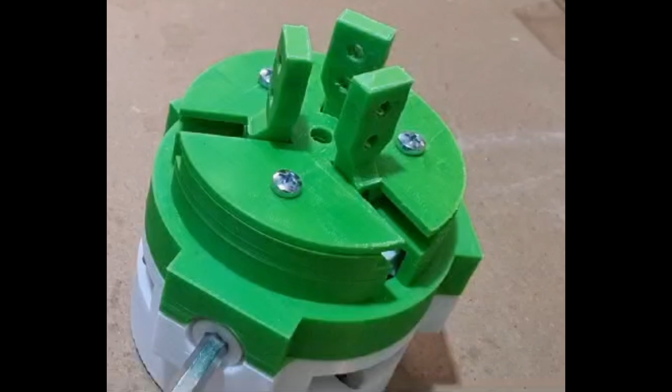Welcome to another tutorial. Here I show how to model a 3-jaw chuck in Solidworks for 3D printing.

Pinion gears in yellow, chuck housing front and back in gray, jaws in blue, driven bevel gear in green, and scroll part in light blue. Pinion gears turn the bevel gear, which has a scroll plate on the other side.

Here is the completed assembly, and we are viewing it from the scroll plate side with the chuck housing front in transparent state. The pinion gear turns the scroll plate, which causes the jaw to translate towards the center of the chuck and away from the center of the chuck depending on the direction of rotation for the pinion gear.

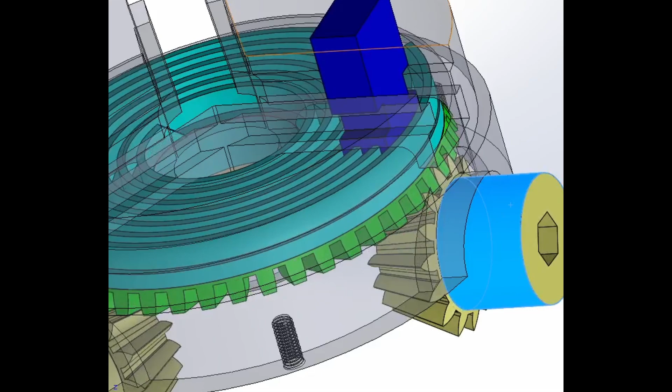We start with modeling the scroll plate. This part threads onto the bevel gear. Here is the basic revolve profile. Start a sketch on the right plane with a center line and add the dimensions to the geometry accordingly.

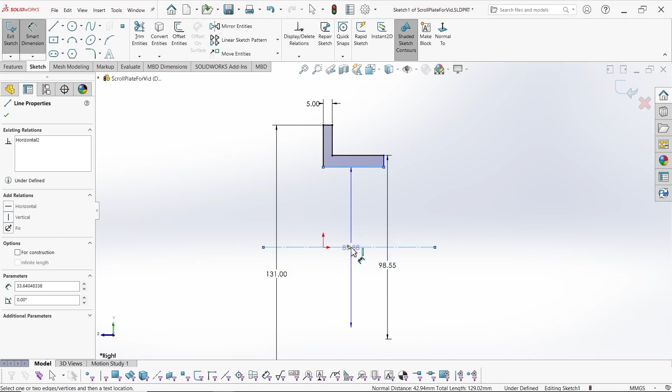Now we need to add appropriate size threads to connect the scroll plate to the bevel gear. I selected M55 by 4 threads. Now in equations, add the external diameter, pitch, thread height, and thread radius.

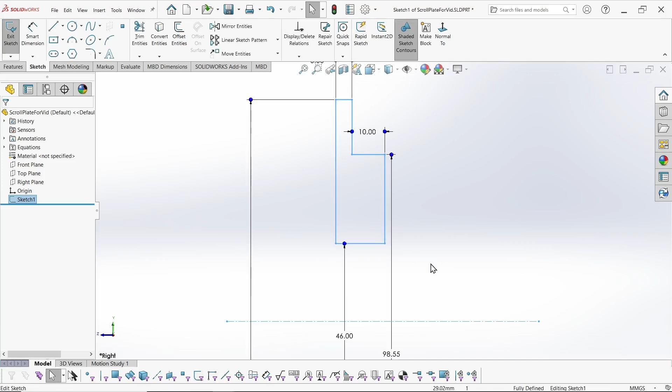Next, set the dimension to external major diameter and cut the external thread as shown using the swept cut command, where the profile is the thread and path is a helical curve.

Before cutting the thread, we need to add a small chamfer to the face. Add a helical spiral where the diameter is the external major diameter and the pitch is equal to the pitch of the thread, or 4 mm per thread.

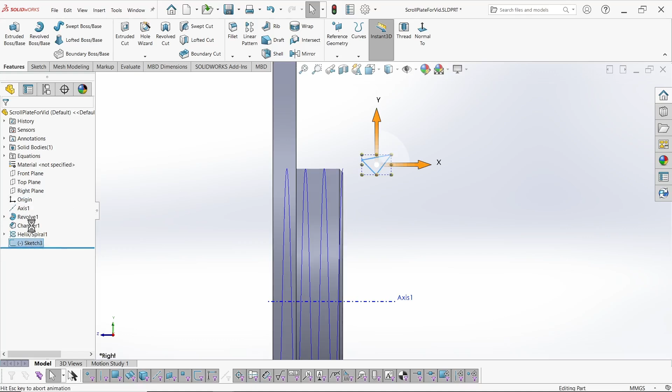Before moving forward, it is good to create an axis that goes through the part. Next, create the thread profile on the right plane. The thread profile has a 60-degree angle, and the dimensions for external major diameter, thread radius, and pitch come from the equations that we added previously.

Constrain the line to be horizontal and draw a vertical line between the bottom of the thread and middle of the thread. Constrain this vertical line to intersect at the midpoint.

Create a 3-point arc connecting the horizontal line to the angled line. Mirror this arc about the center line of the thread and set a tangent constraint between the arc and the lines.

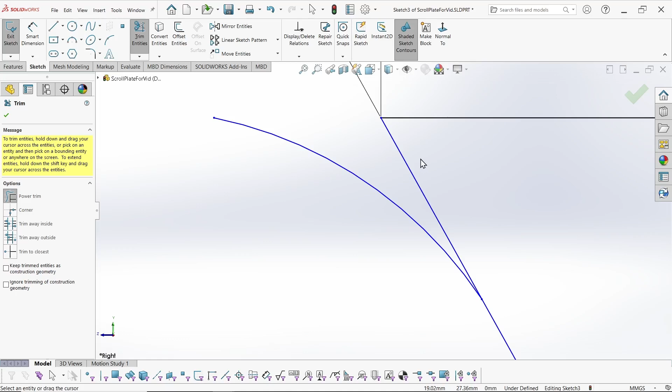Create a fillet at the bottom of the thread and set the radius to thread radius from the variable defined in equations.

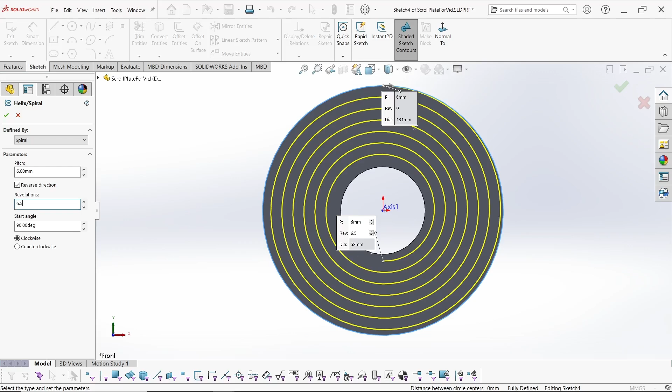The final step for the scroll plate part is to add the scroll. The scroll is a sweep where the profile is rectangular and the path is a spiral. First, create the spiral by setting the pitch and number of revolutions. Then create a sketch of a rectangle on the right plane to be the profile of the sweep.

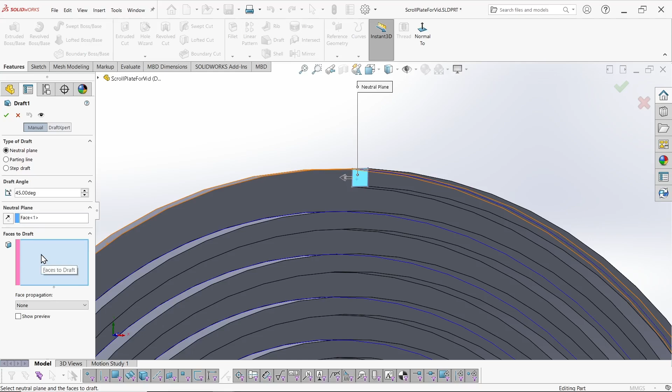Draft the end faces of the scroll plate spiral using the draft command with a 45-degree angle towards the face of the part. Set the face to draft as the small face and the neutral plane as the large diameter face.

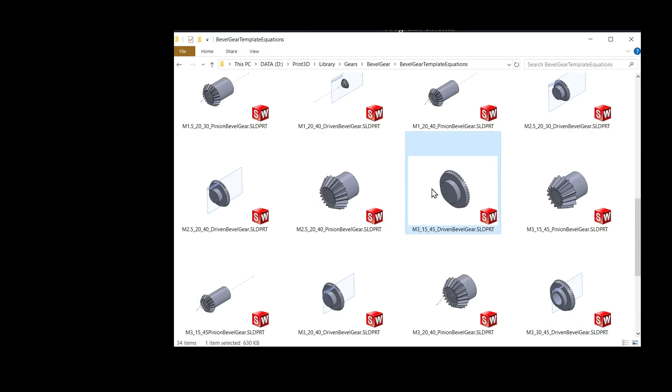Change the color of the part to green so we can see it in the assembly. The next part to create is the bevel gear, which will thread onto the scroll plate part created previously.

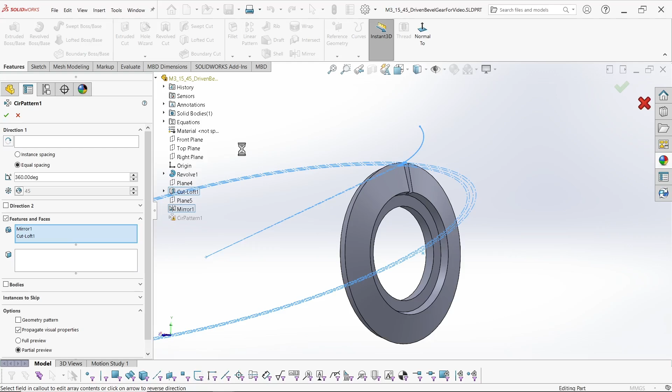Looks like there is an error here which may have occurred due to changing the revolve sketch. The error is due to deleting the axis of rotation of a single tooth cut for the bevel gear. Create a new axis by selecting the right and top planes, and then set it as the axis of rotation to resolve the error.

Next, we add equations for pitch, internal minor diameter using the minimum dimension, thread height, and thread radius. The process is similar to the one shown previously for the external thread.

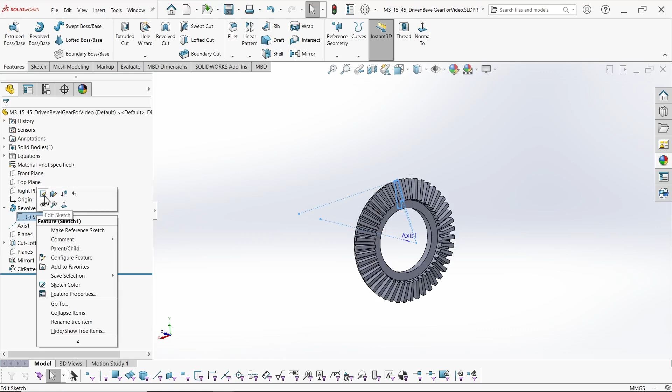Now that we have defined a dimension for the internal minor diameter, we can use it to modify our sketch. We set the internal diameter of the bevel gear to this dimension so that we can cut the internal threads of an M55 by 4 thread. To create the internal threads, we first have to create a small chamfer.

Now, we create the thread profile, which is going to be the profile for the swept cut feature that will be created later. It is good to create a section view with the right plane to help us see what we are doing. To create the thread profile, we start with a sketch on the right plane. Draw a triangle. Draw a center line over the axis of the part and set this line to construction.

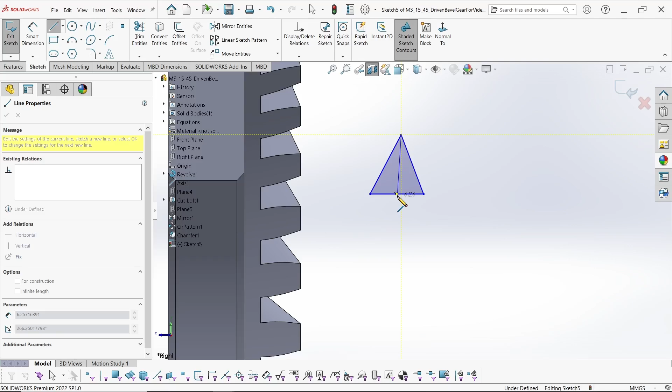Draw a vertical line from the top of the thread to the center and constrain it by making it vertical and coincident to the midpoint of the bottom line. Set the length of the bottom line of the triangle to the pitch. Set the angle between the two lines to 60 degrees. Set the diametrical dimension of the bottom line of the thread profile to the one defined in equations for internal thread minor diameter.

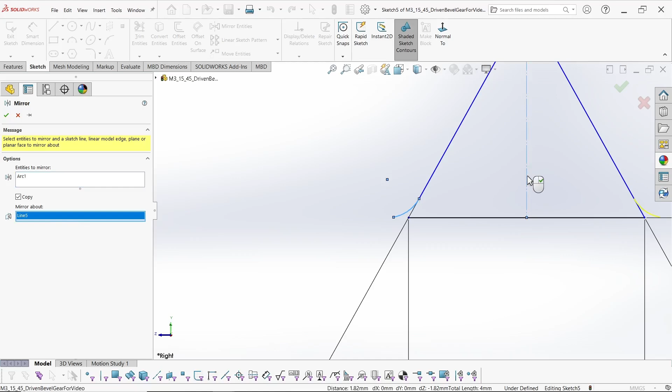Now create a 3-point arc for the bottom corners of the triangle. Create a tangent constraint between the arc and the angled line. Trim the previous line and mirror this arc using the profile centerline as the mirror line. Trim the extra line that is on the other side as well. Then, set a coincident constraint between the end of the three-point arc and the bottom leg of the triangle. It will automatically get set on the other side since this arc is mirrored.

I will need to delete the dimension for the length of the bottom leg and redefine it because SolidWorks is not able to find a solution as the sketch is defined now. I remove 0.005 mm from the pitch so that SolidWorks does not give an error while performing the swept cut. The next step to creating the thread profile is set another tangential constraint between the arc and the bottom line of the triangle. The radius of the arc is set to the thread radius defined in the equations previously.

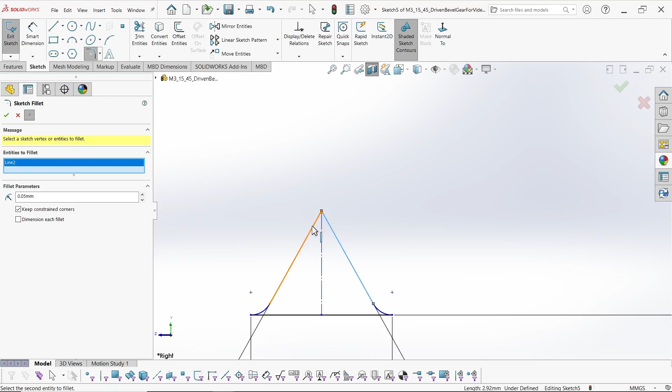The final step for creating the thread profile is to create a fillet at the top corner of the triangle. The radius for this fillet is also set to the thread radius variable defined in equations.

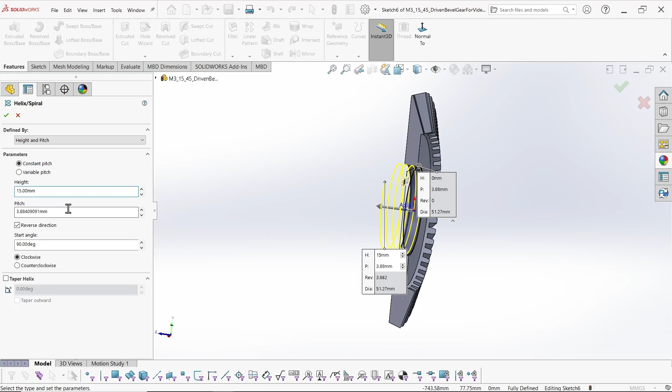It looks like I did not define the helix, which is what I like to do before creating the thread profile. No problem, we can just change the end of part by dragging the line above the sketch that we created previously. Now to create the helix we need to create a sketch that includes just a circle. The diameter of this circle is set to the internal minor diameter defined in equations previously. To create the helix we define a height and pitch. The height just needs to be large enough to go through the part along the z-axis and the pitch is equal to the thread pitch.

The final step for completing this part is to create a swept cut feature. The swept cut feature requires two inputs: a profile, which is the thread profile, and a path, which is the helix. You do need to make sure that the helix starts on the same plane of the thread profile sketch or else you will get an error.

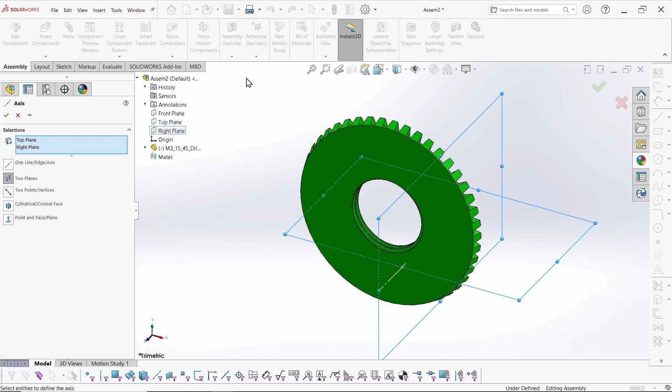We can now begin creating an assembly using the two parts that we have created. The two parts are the scroll plate and the bevel gear. Let's start by bringing in the bevel gear. Let's start by defining an axis for the assembly using the top and right planes of the assembly. Then, create a coincident constraint between the bevel gear axis and this assembly axis.

Next, set the right plane of the assembly coincident to the right plane of the bevel gear. And finally, set the front plane of the bevel gear coincident to the front plane of the assembly. Now that the bevel gear is fully constrained, we can bring in the next part, which is the scroll plate.

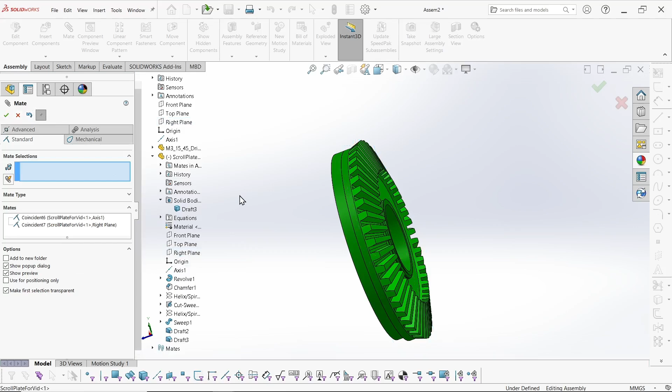To constrain the scroll plate, we start by creating a coincident mate between the faces. Then, we align the axes to one another. Finally, to fully define the scroll plate, we set the right planes of both parts to coincident. I noticed that I set the color of both of these parts to green, so I will go back to the scroll plate and set it to a bluish color.

The next part to create is the pinion gear that will drive the bevel gear. The pinion gear is selected using the same module, number of teeth for the pinion, and number of teeth for the bevel gear. Those values are 3, 15, and 45 respectively.

The only change we will make to the pinion gear is to add a hexagonal-shaped extruded cut. This hexagonal-shaped extruded cut will fit a 13 mm Allen key. The depth of the cut is 20 mm. We change the color of the pinion gear to yellow so that it can be easily viewed in the assembly.

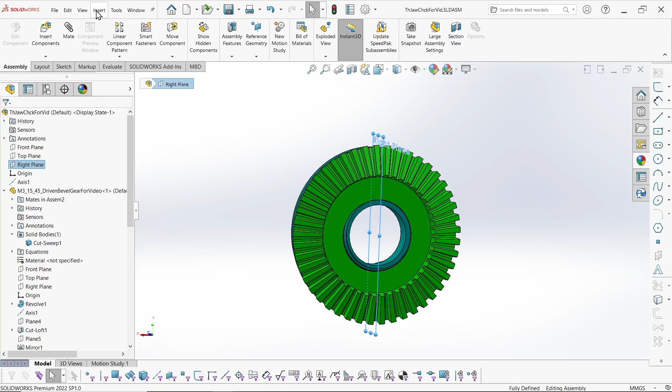Now let's add the pinion gear to the existing assembly. We start by creating mates between the pinion gear and the assembly. We need to use the pitch lines to create the assembly mates, so I will select the sketches from the bevel gear and the pinion gear that contain the pitch lines and show them in the assembly. Pitch lines are lines of action between two mating gears.

It looks like I don't have an axis for the pinion gear. So, let's open the pinion gear and create an axis using the top and right planes. You can use the cylindrical face instead of an axis for a concentric mate in assembly, but I prefer to use an axis because I know it will always be available and it is more intuitive.

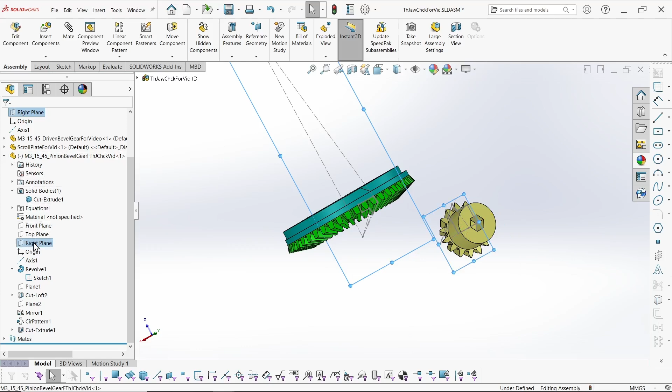We start constraining the pinion gear by mating the right plane of the gear with the right plane of the assembly. Then we mate the pitch line of the pinion gear to the pitch line of the bevel gear. These sketches need to be shown in the part in order to select them in assembly. The final constraint is to set the line that defines the back or end of the gears coincident. Once again, this line is available in the sketch used to create the gear, so it must be set as shown.

Now we can hide the sketches for the pinion gear and bevel gear because their lines are no longer needed. Further, they are annoying to see in assembly. Now, we can have a bit of fun by giving our assembly a satisfying twirl to see how it looks from various angles. Next, we need to create a housing for the chuck.

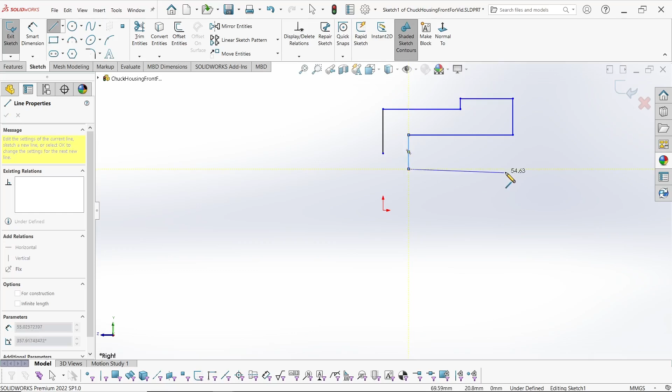The housing is split into two parts that are bolted together using M6 size bolts. The purpose of the chuck housing is to hold the bevel gear and the pinion gears in place so that turning the pinion gear will cause the bevel gear to rotate. I aptly named the two sides of the chuck housing as chuck housing front and chuck housing back. We will start with the chuck housing front.

To create this part, we begin with a sketch that will be revolved. Again, I like to create an axis between the top and right planes as it is useful for creating revolves, mating, circular patterns, etc. The sketch to be revolved needs a center line that is coincident with the axis created previously. This center line will be used to create the diametrical dimensions.

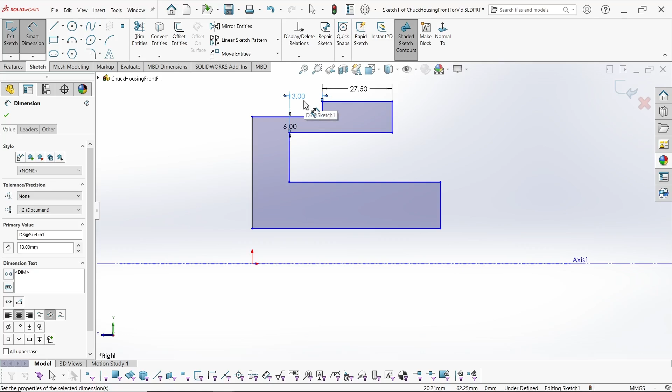The dimensions along the z-axis are mainly constrained by minimum wall thicknesses and have to be long enough to hold the scroll plate and bevel gear. The hole in the part reduces the amount of filament and weight of the part. The large outer diameter is set to 160 millimeters. The smaller outer diameter is set to 45 millimeters so that the scroll plate and bevel gear fit snugly to it. The inner diameter is set to 32.5 millimeters and the rest of the dimensions are set based on what looks appropriate.

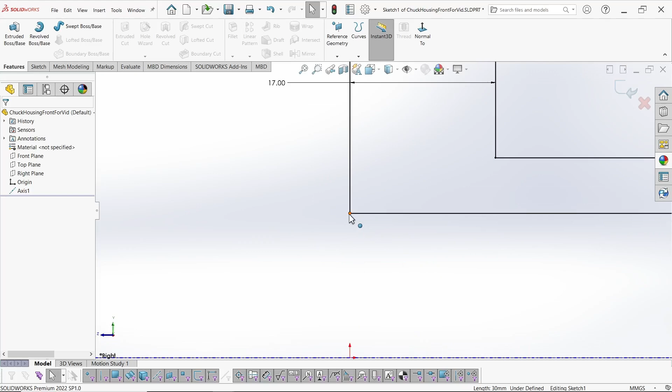Going back to the sketch, we just need to set a collinear constraint between these two lines. I also set the inner diameter to 140 millimeters to clear the outer diameter of the scroll plate and bevel gear.

The next step is to cut the paths for the jaws. There are 3 jaws, so a circular pattern of 3 jaw paths will be created. The jaw path is cut from the larger outer diameter up to the smaller outer diameter, as we will see in the coming steps. I first create a sketch on the XY plane with 1 jaw path and then create a circular pattern of 3 paths around the center.

This will help us visualize what is an appropriate size for the jaw paths. I want to make sure that the paths are large enough to hold a reasonable size jaw, but not too large to the point where I have no material left in the chuck housing front part being modeled here. Now you can get arc dimension by clicking on the 2 arc endpoints. I set this dimension to 1 millimeter to ensure that I maximize the size of the jaw paths and that I have some wall material after I create the cut.

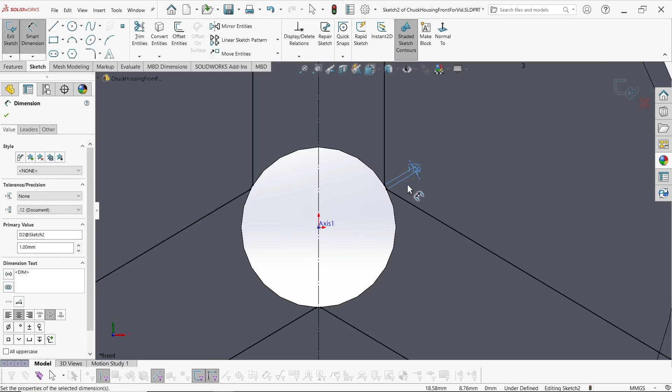Next step is to create a plane which starts at the outer diameter of the part. This plane will be the sketch plane for the jaw path cut.

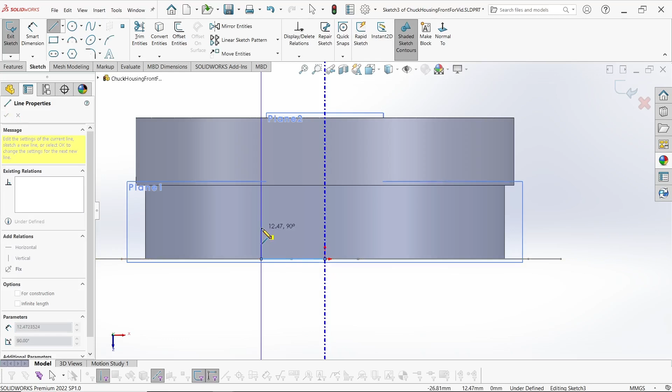Now we create the sketch for the jaw path. Start by drawing a profile for what the jaw will look like. Place a center line that is coincident with the axis in the middle of the profile to be used for mirroring and dimensioning. The dimensions are basically designed to be big enough to allow for translation of a 3D printed jaw. The jaw is the smallest part of this whole assembly.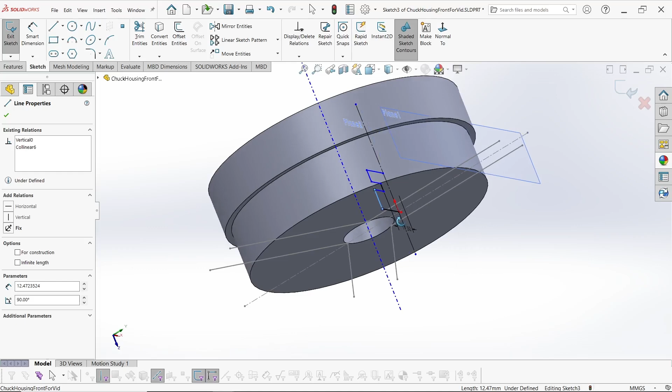Here I changed the sketch plane to the outer plane. I was accidentally sketching on the incorrect plane. You can right-click on a sketch and change the sketch plane from the pop-up menu.

Set a pierce constraint between the corner of the jaw cut profile and the sketch that was previously created on the XY plane. Grab the bottom surface of the face where the scroll plate and bevel gear will sit and use the Convert Entities command to create a line on the sketch plane. Convert this line to construction.

Use the cut feature to extruded cut this profile created. Start from the sketch plane for the cut. Under Directions, select Up to Surface and select the outer cylindrical face shown.

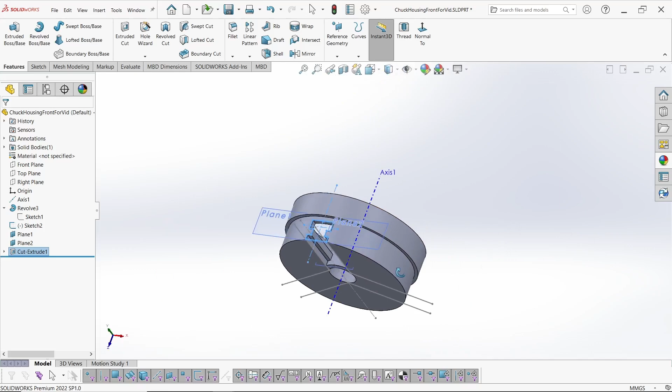The next step for creating this part is to cut a semicircular shape. This shape will be for the pinion gears. The pinion gears and the jaws will be in the same planes as one another, and there will be 3 of each. Set a coincident constraint for the circle and set the diameter to 40 millimeters. Make sure that the cut clears the part in both directions.

Now we need to cut a little material to clear the large part of the pinion gear. Remember that bevel gears do not maintain the same diameter and that they are larger towards the outer portion of the gear. Start by creating a sketch on the face of the housing. Draw a center line that is coincident with the axis of the part and draw a rectangular shape that will be used for the revolved cut feature.

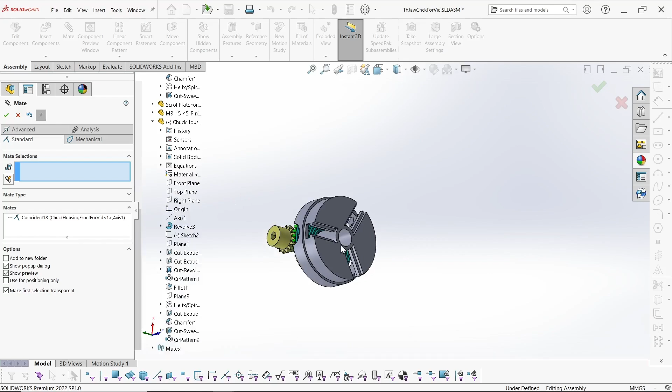This assembly shows why I printed the scroll part and the bevel gear as two separate parts, whereas you would likely find it as one part if it were made out of steel. When it is two parts, one can print both the scroll plate profile and the bevel gears in the up direction. This ensures an accurate and smooth finish, otherwise I would have to remove support material, which does not give accurate dimensional results depending on the level of patience that I have when removing the supports.

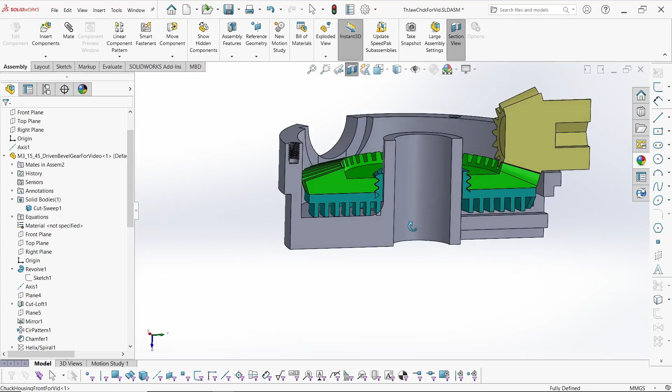Finally, we constrain the pinion gear to the semicircular cutout in the chuck housing front. Showing a section view of the assembly helps us visualize that everything is placed correctly. Now we see that there is some interference between the fillet of the chuck housing front and the helical spiral profile of the scroll plate. This is resolved by decreasing the number of revolutions for the helical spiral profile.

The next part we need to create for the assembly is the chuck housing back. This part is very similar to the chuck housing front. We start with creating a sketch that is going to get revolved on the right plane. We need a center line for dimensioning and revolving purposes.

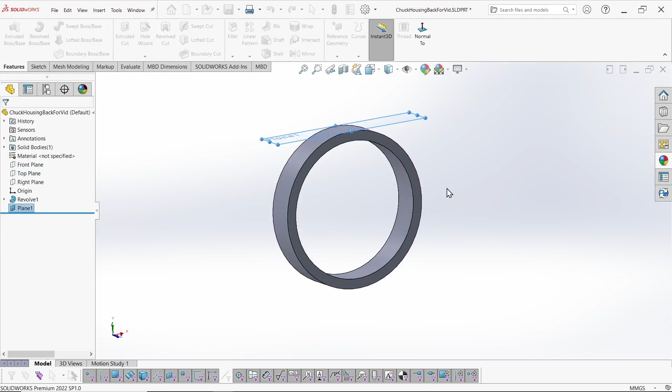Now create a plane that is parallel and tangent to the top plane. This will be the sketch plane for the semicircular cutout. This will be lined up with the other semicircular cutout on the chuck housing front part. Together, they will hold the pinion gear in place.

Create a sketch on this plane and draw a circle that has a diameter of 40 millimeters. Create an extruded cut through the entire face of the cylinder from the outer diameter to the inner diameter. Now, we need to create a small extra cutout, just like with the chuck housing front, where we needed to remove a little extra material to accommodate the larger portion of the pinion gear.

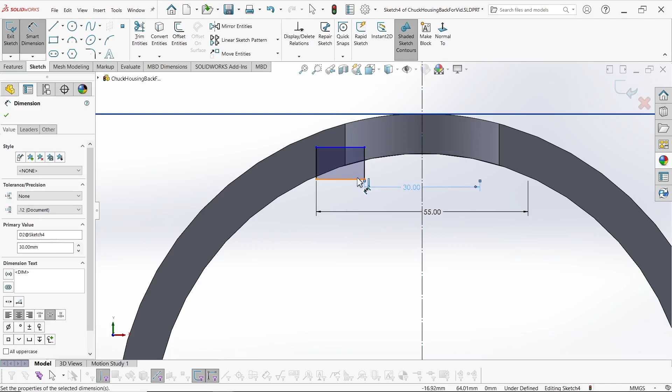Start by creating a sketch on the face of the cylinder. Draw a center line to dimension from and draw a rectangle. We use the same exact dimensions as the chuck housing front for the sake of consistency. Then create a revolved cut from the rectangle, and the profile that holds the pinion gear is now complete. We also need to create an axis for this part. Then create a circular pattern around this axis.

Now, we also need to create a through hole for the size M5 screw that will hold the chuck housing front and chuck housing back parts together. These through holes will be located at angles between the revolved cuts for the pinion gears. Since we are going to circular pattern these three holes, let's bring the bottom of part line up before the circular pattern in the Solidworks feature tree.

Draw a construction line that falls between any two of the revolved cuts. Dimension this line to be 60 degrees. Draw a circle that is 6 millimeters in diameter for the M5 screw. Create a coincident constraint between the center of the circle and midpoint of the construction line drawn between the inner and outer diameters of the chuck housing back.

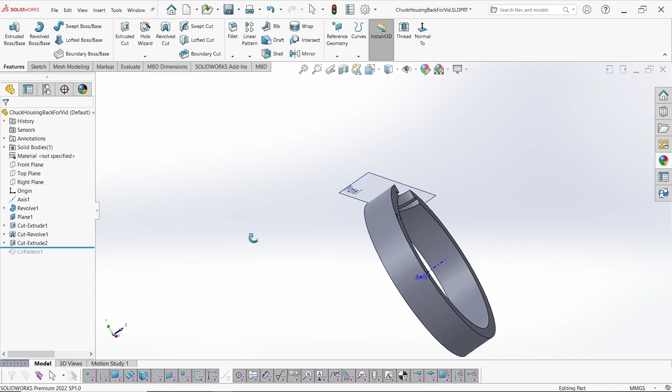Now, we need to remove some material where the through holes are. This will allow us to use the M5 screws that we have, which are 30 millimeters long. To create this cut, we need to create a few features before that. The first feature is an axis for the through hole that we created previously. Then a plane that contains both the axis of the through hole and the axis of the part.

Next, we create a plane that is perpendicular to the previously created plane. Finally, create a plane that is going to be the sketch plane for the rectangular profile cut. Looking back at it, I see that there could have been an easier way to create this plane, but this is the method that occurred to me while I was modeling this part.

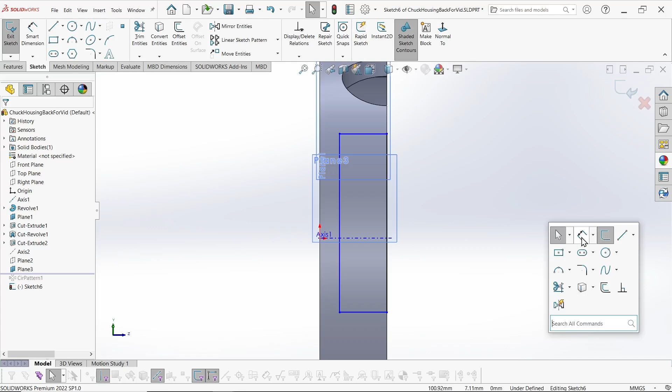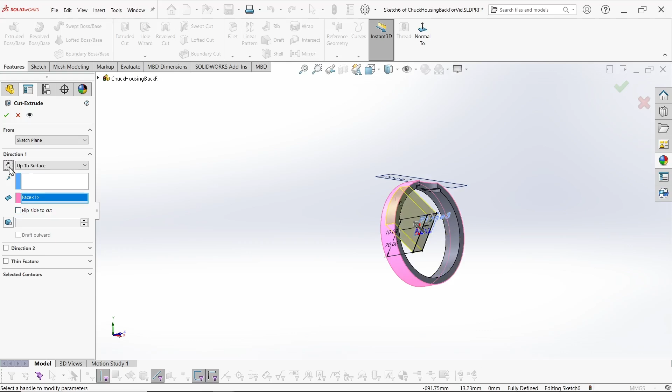Now create a sketch on this plane. The sketch is a rectangle to be used as a cut from the outer diameter to the inner diameter of the chuck housing back. Let's leave about 10 millimeters of wall after this cut. Now, include this rectangular cut in our circular pattern to finish the part.

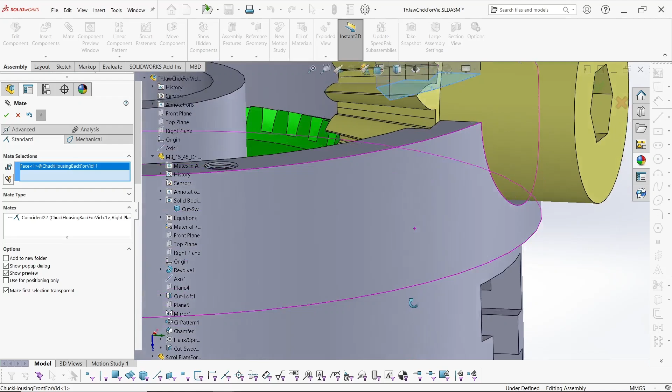Now, the final step is to include the chuck housing back into the assembly. The constraints for the chuck housing back are similar to the constraints of the chuck housing front. Namely, they are an axis constraint between the center axis of the part and the center axis of the assembly. We also need a coincident constraint between the two mating faces of the chuck housing front and the chuck housing back. Finally, we need to constrain the axis of the cutout to the axis of the pinion gear.

After placing this part in the assembly, we realize that the rectangular cut is placed incorrectly and should be removed from the other side. This is an easy fix. All we need to do is edit the sketch of the cutout. Solidworks automatically goes into edit mode of a part when we select edit sketch of a part in an assembly.

Isn't Solidworks just terrific? Edit this sketch to create the cut on the proper side by trimming the existing coincident line and removing the coincident constraints between the points and the line. Create the 10 mm dimension as before. Finally, let's create a circular pattern in assembly mode of the pinion gear.

The next parts to create are the jaws. The jaws will be created using the Solidworks Combine feature with the existing scroll plate. So we will open the scroll plate and save it as a new part aptly named scroll plate for cutting jaw. The bottom of the jaws mate with the helical spiral profile of the scroll plate, therefore the bottom of the jaws will have the negative profile of what is on the scroll plate.

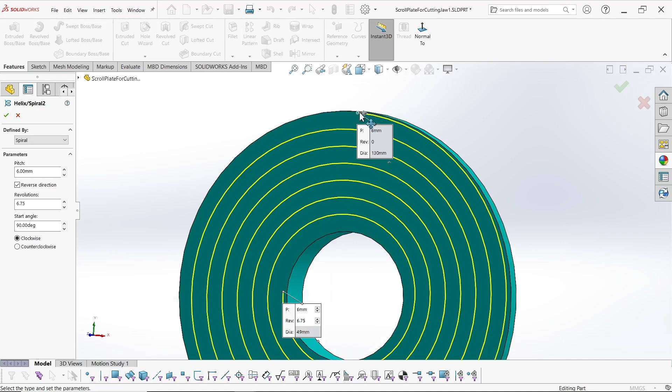To create this profile, we start by deleting the drafts because they are no longer needed. We extend the spiral of the helical spiral sweep outward to extend past the outer diameter of the scroll plate. This is done by defining another helical spiral that starts at the same location of the original helical spiral but goes in the opposite direction.

Select Helix from the Curves drop-down menu. We are now prompted to create a sketch with a circle. This circle has the same diameter as the diameter of the scroll plate. Reverse the direction of the helical sweep and use the same value for pitch as before. We do not need the same number of revolutions as before, we only need a few to be able to cut the jaws from the bottom side as will be shown shortly.

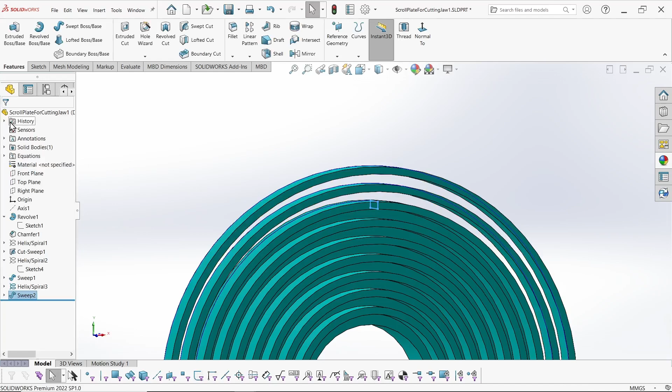The next step is to create a plane for each jaw. By convention, we set jaw 1 to be perpendicular to the right plane. So, I renamed this plane to jaw 1 to help us identify it later. Here, I created an assembly composed of the scroll plate for cutting jaw part and the chuck housing front part. I did not show the steps for creating this assembly, but it is a few simple mates that you should be able to figure out by following along other assembly creations.

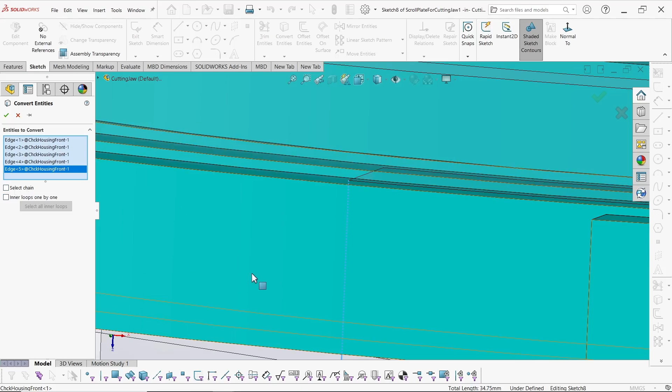Now, enter edit mode for the scroll plate for cutting jaw part and create a sketch on the jaw 1 plane created previously. Use the Convert Entities tool and select the cutaway path profile in the chuck housing front part to bring these lines into the sketch. Now, exit the sketch and end the edit part mode in assembly. Open the scroll plate for cutting jaw part by itself because we have what we need from assembly mode and can concentrate on creating the jaw 1 profile.

Select and convert the lines of the cutaway for the jaw profile in the chuck housing front part to construction lines. We need to remember that the jaw slides through this cutaway profile and thus needs to be a little bit smaller. How much smaller? Well, this really depends on your printing capabilities and how tight of tolerances you can obtain for bridged parts. For me, I am using 1/2 millimeter. Draw a center line in the middle of the jaw to use as a mirror line. Select the lines and mirror about this center line to finish the sketch.

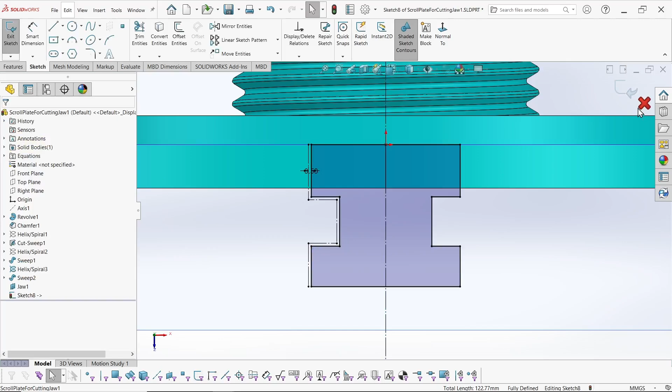Now, extrude the sketch to create the first jaw, or what we are referring to as jaw 1. We create jaws 2 and 3 the same way. But first, we need to create new sketch planes that are 120 degrees apart. Jaws 1, 2, and 3 are the same, but the only difference is that they have a differing cut profile at the bottom, so that they are all exactly the same distance from the center of the chuck at the same time.

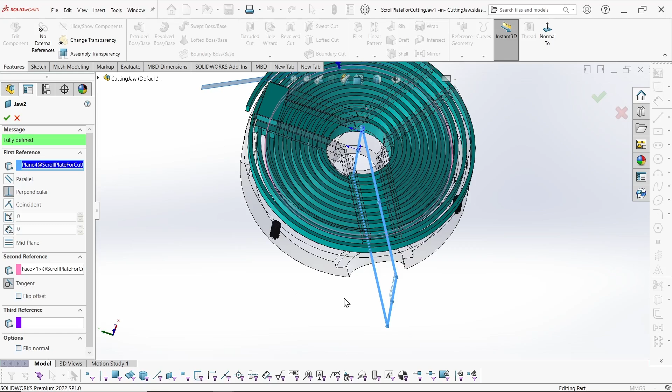Here, I go into assembly mode in order to define the planes for the other jaws to make sure that they are correctly placed. I then rename the plane for Jaw 2 as Jaw 2 plane. Next, we create a sketch on this plane much like we did for Jaw 1. Select the Convert Entities feature and select the lines that define the cut profile for Jaw 2 in the chuck housing front part.

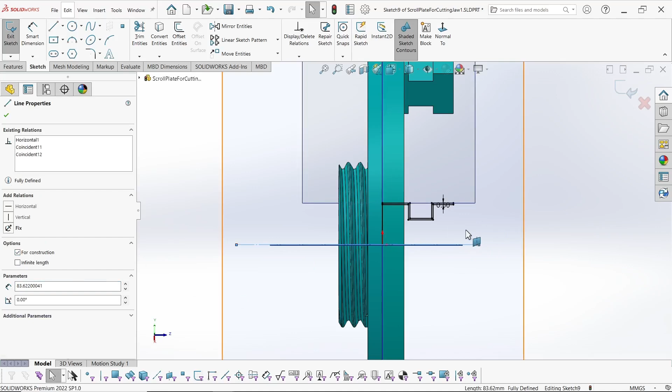Once again, offset the entities inward because the Jaw 2 will be slightly smaller than the Jaw 2 cut profile from the chuck housing front part. Use an offset of 0.5 millimeter. Convert the lines that were converted from edges to construction lines. Draw a line in the middle of the part and use the mirror command.

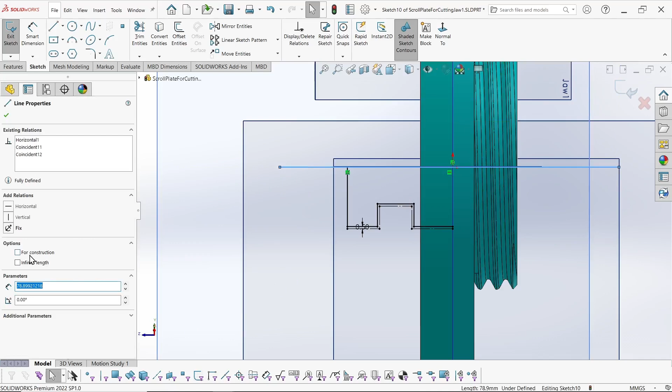We will now configure this part in 3 derived parts, which are Jaw 1, Jaw 2, and Jaw 3. In order to configure a part in Solidworks, just right-click on the feature that you want to be varied for each configuration and select Configure Feature. Add 3 rows to the Configure Feature table and name each row Jaw 1, Jaw 2, and Jaw 3. Solidworks will automatically create different configurations for this part. Each configuration will have the remaining jaws suppressed. For example, for the Jaw 1 configuration, Jaws 2 and 3 are suppressed and so forth.

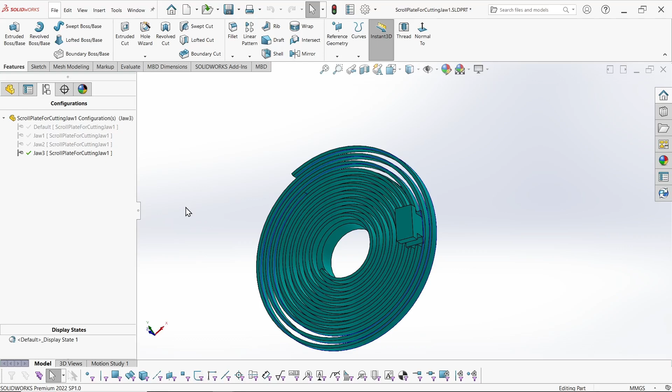Now let's check if the configurations are working properly by selecting the derived parts Jaw 1, Jaw 2, and Jaw 3. The next step is to use the combine feature with the subtract option. I note that the combine feature is dim and not available. This feature is only available if there is more than one body available. I need to go back to the extrude feature and uncheck merge result.

That will result in two bodies for this part, and now the combine feature is no longer dim and available. I will use the subtract option for the combine feature where the main body is the jaw and the bodies to combine is the scroll plate. We note that the jaw is cut with the proper profile using the scroll plate from the bottom side as required. Now, I have to repeat the same steps for the other two configurations.

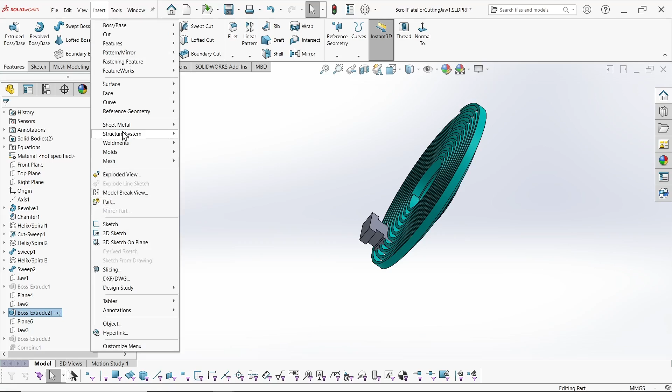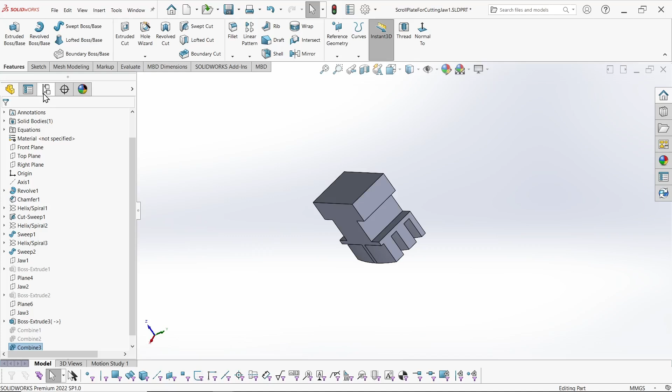First, uncheck the merge result tick box in the extrusion feature and combine the extrusion with the scroll plate. Once again, we inspect all three configurations to make sure that we have the desired result. And of course, the mandatory Solidworks twirling of the part.

Now there is one important step that needs to be done before the combine feature. This step is to slightly increase the size of the helical spiral profile of the scroll plate part. This profile must be increased or the profile on the jaws will be line on line, so to speak, with the helical spiral profile of the scroll plate. This will obviously never work and cause the jaws to get jammed in the scroll plate.

So, we go to the rectangular profile that is 7.5 by 2.5 millimeters for the scroll plate and increase it. Modify the existing sketch by converting this rectangle to construction lines and manually draw an offset rectangle that is slightly larger than the scroll plate rectangle. Add a dimension between the existing rectangle with the amount of 1/4 millimeters.

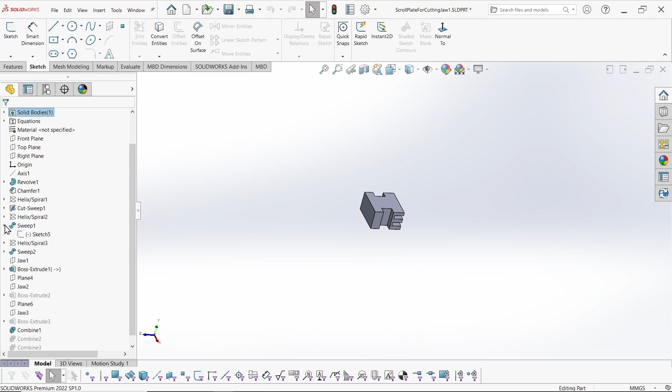We can now see that there is some clearance between the helical spiral profile of the jaws and the scroll plate along a radial axis from the center of the three jaw chuck outward. However, we note that there is no clearance between the jaws and the scroll plate from the top side. Let's go ahead and modify the sketch to change that as well. We first need to change the end of part by dragging in the feature tree. Then, edit the existing sketch, remove the coincident constraint, and then add a new dimension of 0.5 millimeter.

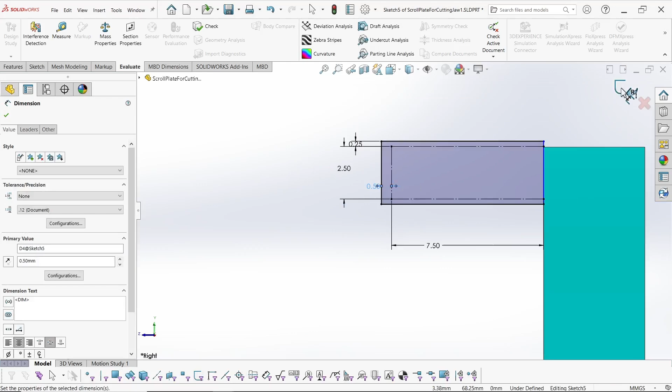Here, I note that there is a small amount of wall for the jaw. Remember that we are 3D printing this part. 3D printed parts may snap easily depending on factors such as geometry, layer direction with respect to applied load, and quality of layer adhesion, etc. I will feel more comfortable by changing this wall thickness to something more reasonable for a 3D printed part. Let's go ahead and change it to 3.5 millimeters.

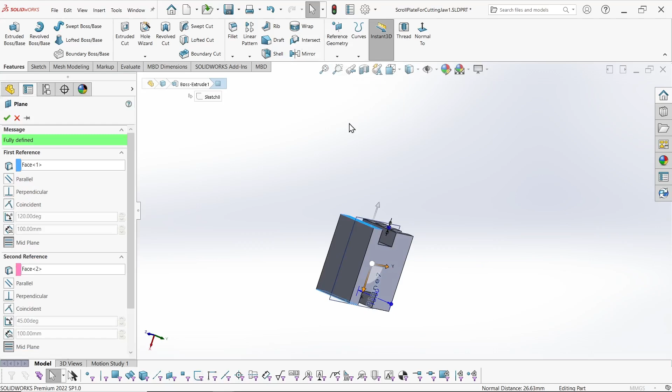We are done with the three-jaw chuck assembly as far as creating parts and assembling them is concerned. It is always good to use Solidworks to prove to yourself that the assembly is correct and will function properly. Otherwise, you will be running a lot of extra prints, resulting in wasted time and filament. Of course, this is still better than walking onto the shop floor and giving your subpar design to a machinist who instantly finds basic flaws in it within seconds. But nevertheless, this is a bit of a heartache.

For the case of this assembly, we want to see some proof that the combine feature for the three jaws resulted in the proper cut profile on the bottom. We will check this by placing jaw 1 in an arbitrary location that it can achieve while the helical spiral profiles mate with one another. Now, we need to create a reference axis to use for measurement purposes. We create this axis by first creating a plane in the middle of the part and then creating an axis where these two planes intersect.

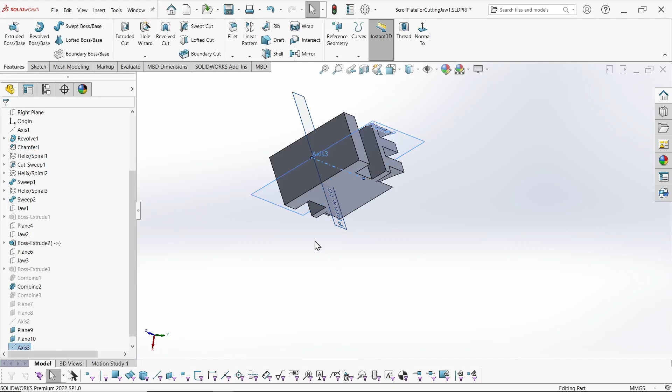Then, we measure the distance between the center axis and this jaw. Then, we place one of the other jaws at this exact distance because that is what we want from our 3-jaw chuck. Then, we must ensure that the helical spirals for the other jaw and the scroll plate are meshing properly at that distance. This measured distance turns out to be 47.54 millimeters.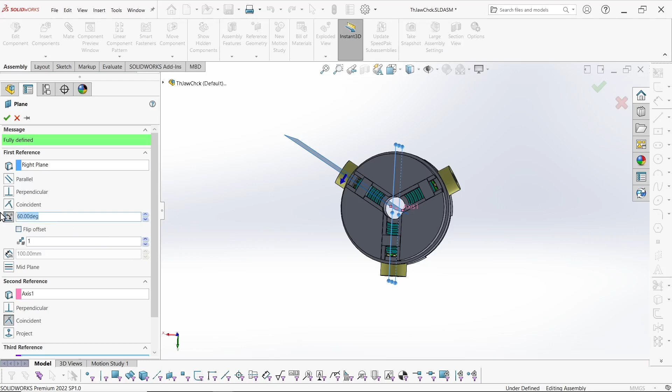Now we create a plane that is parallel to the midplane of jaw 2. This plane is required in order to set a distance mate between the jaw 2 midplane and the newly created plane. This distance is set to 47.54 millimeters. We now need another assembly plane that is perpendicular to the previously created assembly plane to view the cross-section of the jaw and scroll plate. Everything looks great.